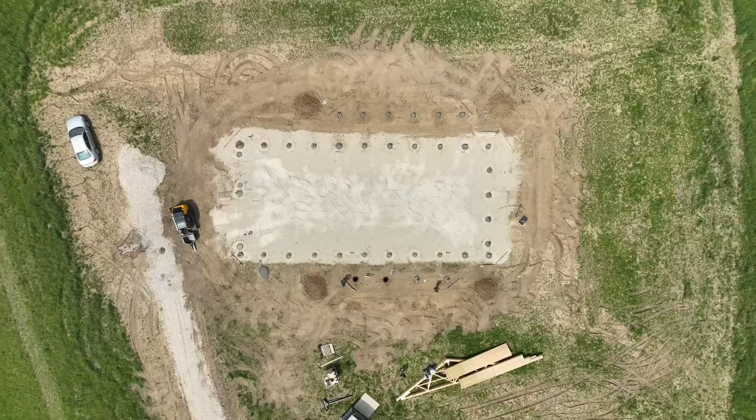We started a new build on Tuesday, so we got the footings in, brackets, and a couple walls already built. I'll give you a rundown of this project, what it is. It's a 36 by 72, 19-foot sidewalls. It's going to be a pretty cool place.

We're doing the shell, and the clients are going to try to finish this out on their own. We'll see if we can get you in here to see this, but there's going to be a master across the whole back of the house, and there's going to be an office.

There's a huge kitchen, open area, and when you come in the front door, which are double front doors, there's going to be staircases going up both to the right and left, and a catwalk between them. There'll be 3 bedrooms, a couple bathrooms upstairs, plus a huge bonus room that overlooks a 19-foot ceiling. It's going to be a pretty cool place.

But we'll take you up here and show you kind of the layout. We'll revert back to the plans, but for those of you who don't know, we design post frame barndominiums, shops, garages, whatever the case may be.

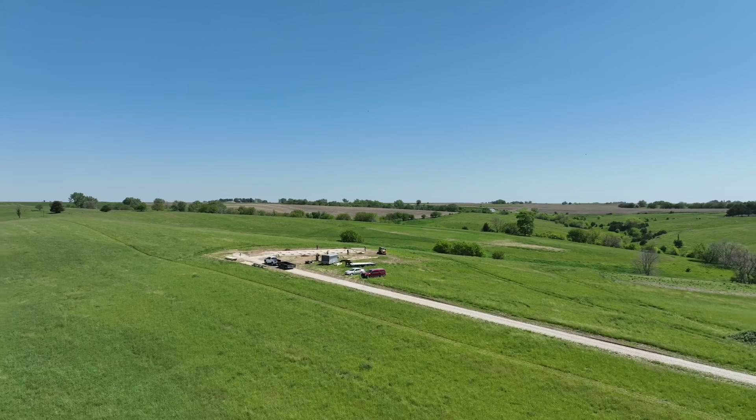But we'll go over here and check this out and show you what we got going on. So you cannot see this place from the road, but there's a long driveway. The driveway comes up here, and then you will enter the garage.

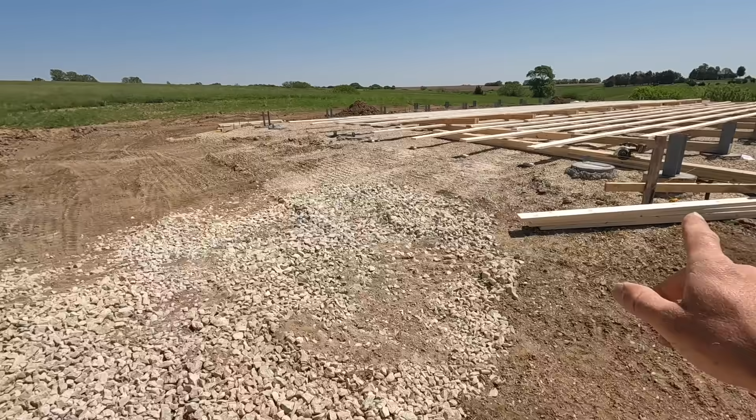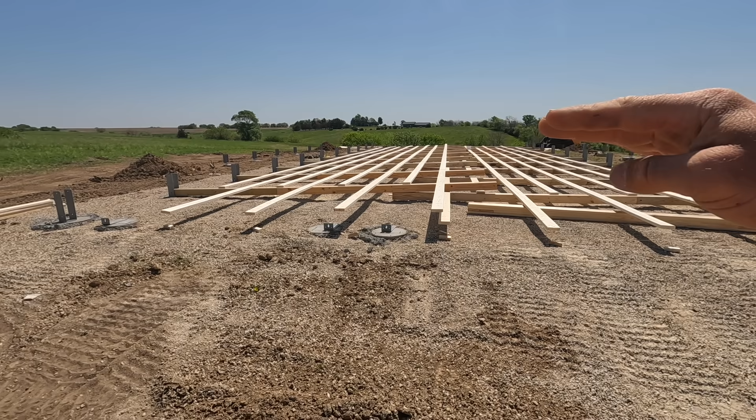So we have a 16-foot wide garage door, and then a 9-foot garage door right here. Over the garage there's going to be a room. I think there's 17-inch floor trusses in this build, and that's why we had to go with 19-foot sidewalls in order to span the width of this garage here for those floor trusses.

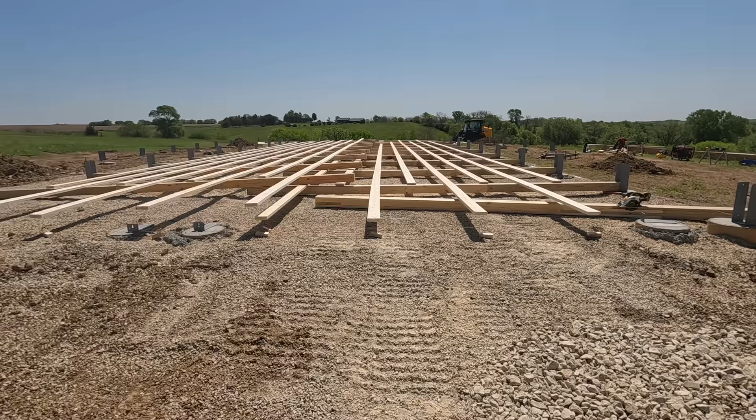But in the front, which is the front, as you're coming up the driveway, there will be a 30-foot wide A-frame. It's got 4 posts, 10-foot spacing, so there's going to have to be a glulam to go all the way across there, and then there will be a big A-frame going in the main entrance.

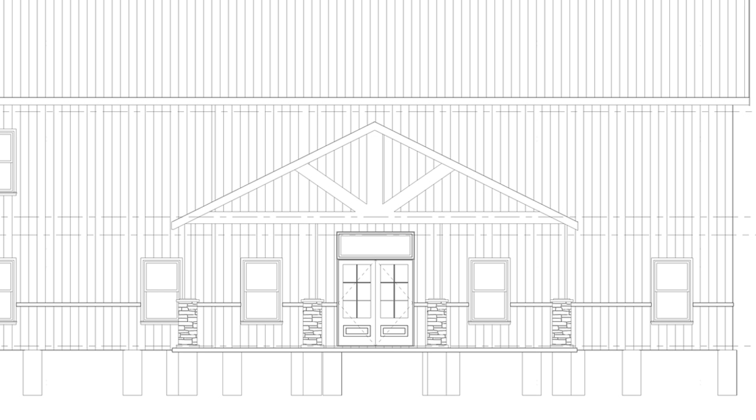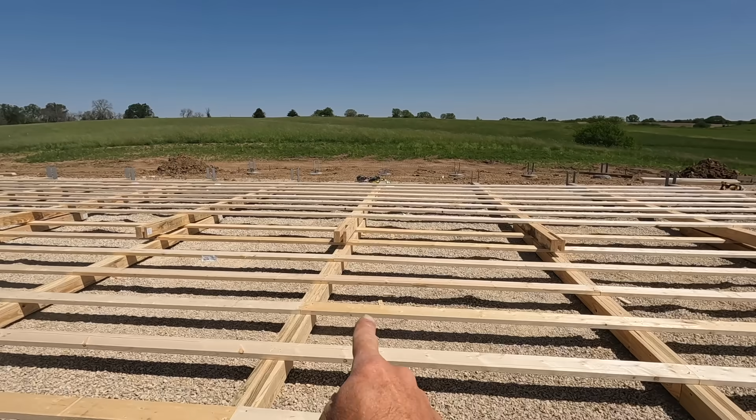Which will be double doors. So the double doors will be right here, and as soon as you get in, there will be a staircase going up to the left and a staircase going up to the right. You'll be able to see all the way through to double doors going out onto a 40-foot by 10-foot deep porch in the back. It's going to have hip ends like you see us do, not gable.

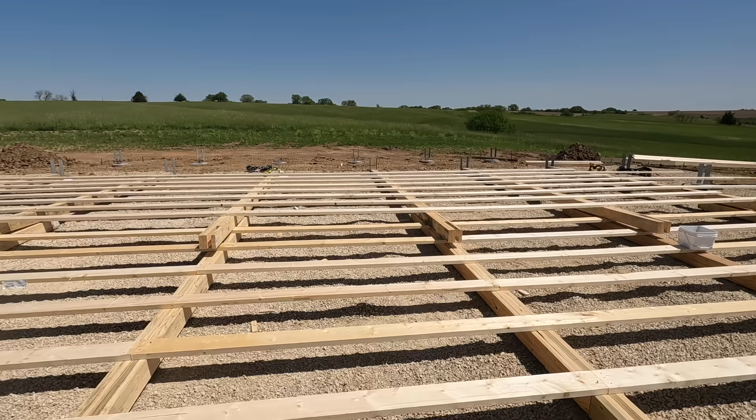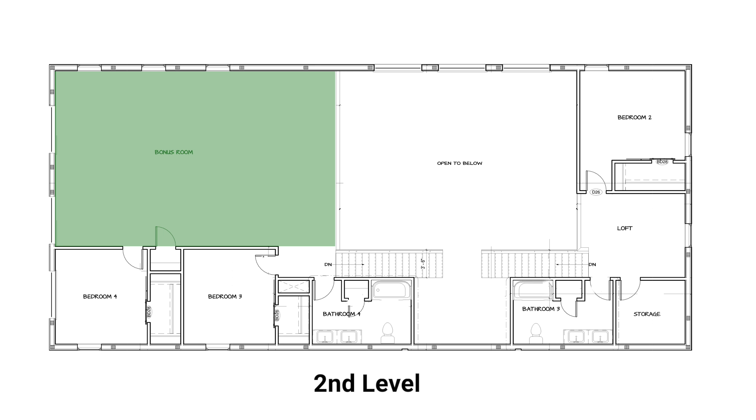The master will run all the way along the back, and then there's an office down here. This is a big open area. There will be a catwalk between the 2 stairways, and like I said, there's 3 bedrooms, 2 bathrooms, and then a huge bonus area above the downstairs. So it's going to be pretty cool.

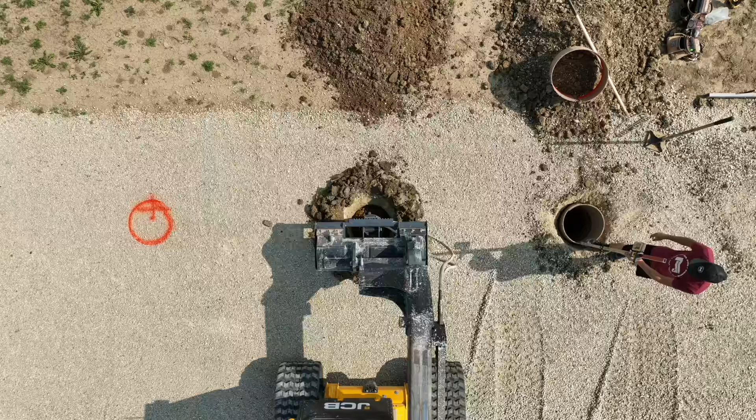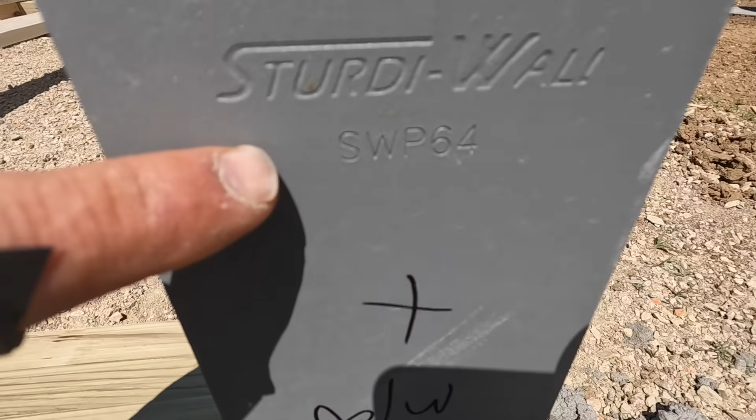Some of the things structurally with this building is we did 18-inch piers. That's kind of our standard, with Sturdi-Wall brackets. I don't know if we can see that. This is a 2x6 4-ply column.

So we got SWP 64s, and they are wet set into our pier. The piers have C4 in them, which is commonly used in any footing application.

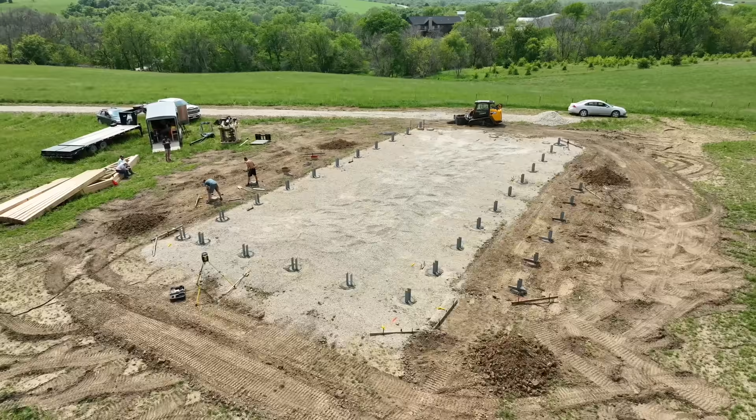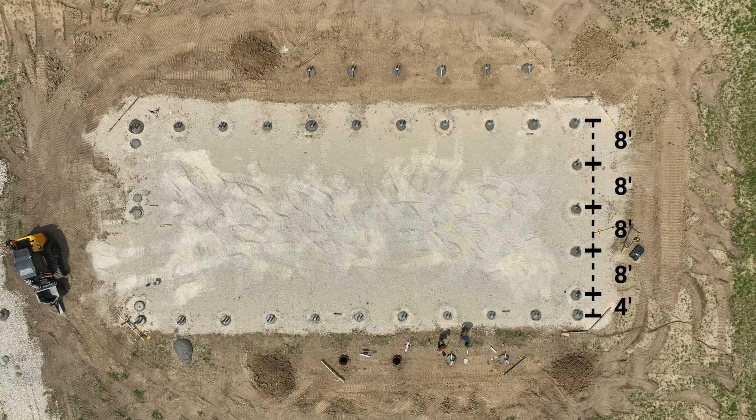This is 4,000 psi concrete, and our piers and columns are all 8 foot on center. We do have a little bit of an odd spacing on the back side because the building width the client wanted was 36 feet. So we had 8 foot, 8 foot, 8 foot, 8 foot, and then there's just a little 4-foot section over there. Typically we try to stay away from that unless somebody wants what they want, and then we work around it.

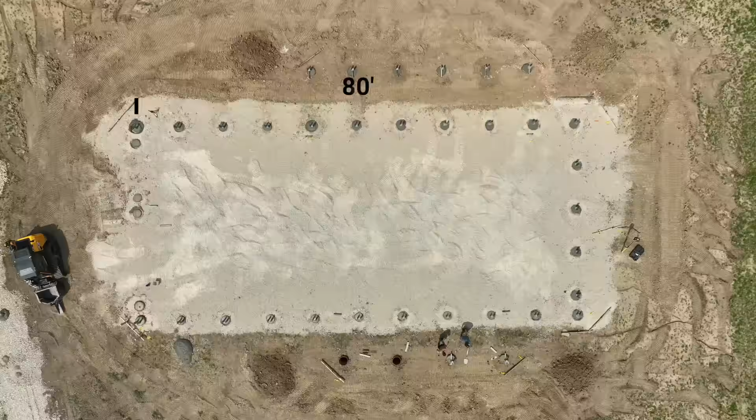It's not nearly as important on the end walls as it is on the side walls. This along here is 80 foot, so we are 8 foot on center all the way down the side, so our trusses will sit on a column on each side, so they're perfectly in line, and all of our trusses are 8 foot on center.

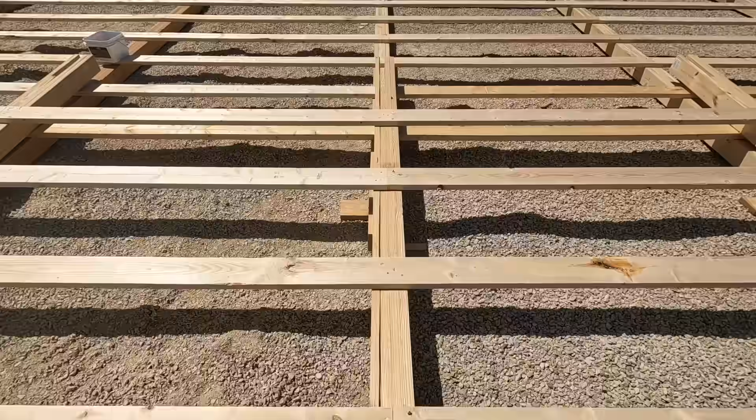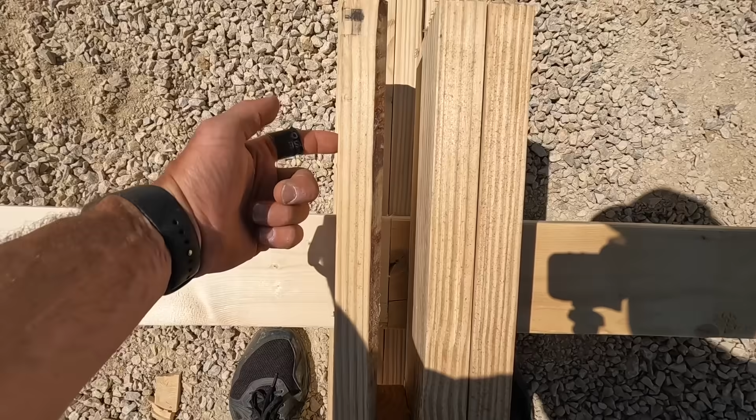They will sit in these pockets at the top of our column. So the truss will get set in here, we'll nail it in with 30D ring shank nails, and then we will run a 1/2 inch through bolt through the top once our building is squared to lock this all together.

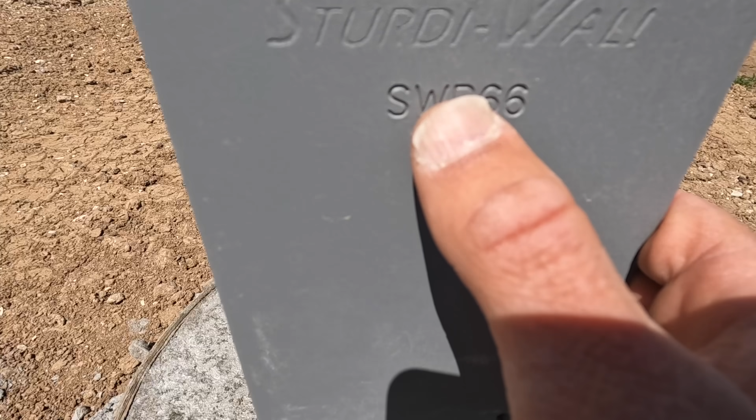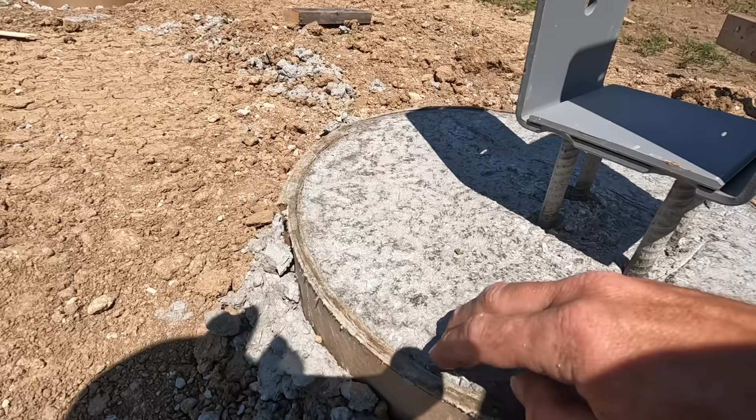As far as all of our porch brackets, we are using 6x6 posts, so that bracket is an SWP 66, which is for a 6x6 post. You can see what we will do is find the final grade of our concrete, which is right below this bracket, and then we will set our pier 3.5 inches below that.

So when we pour this, we'll slide a 2x4 across so it sits on this form, take our bracket down until it hits that, and what that does is allow us, when we pour our concrete porch, to pour the concrete through here, and then there's no outside corners that can potentially crack. If you box this in and pour it, there's a high probability that eventually you'll get little cracks off the corners. Anytime you have an outside corner on concrete, there's a high probability that you'll get a crack from there.

So that's how we deal with that, and it makes it real quick and easy to set these brackets without having to build any forms, because if we were to box them in to pour a box for our bracket to sit on, it would just take a lot more effort.

I used to do it like that, and I got to thinking, why don't I just set this bracket up a little bit, pour the concrete under it, and it's worked amazing. So that's how we do it on all of our porches. We have videos on that we can share with you.

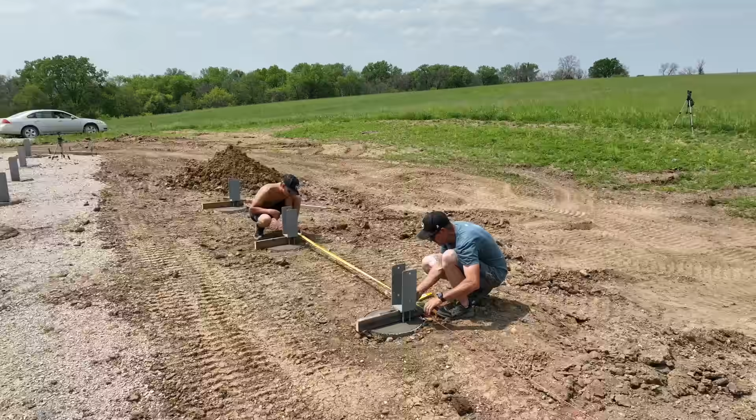You can see it sits up. This is not an issue. We do not do this on the main structure of our house, but on our porches we do.

So if we step back here, this is the back side of the house. We've got the double doors coming out, and then we have a 40-foot wide porch.

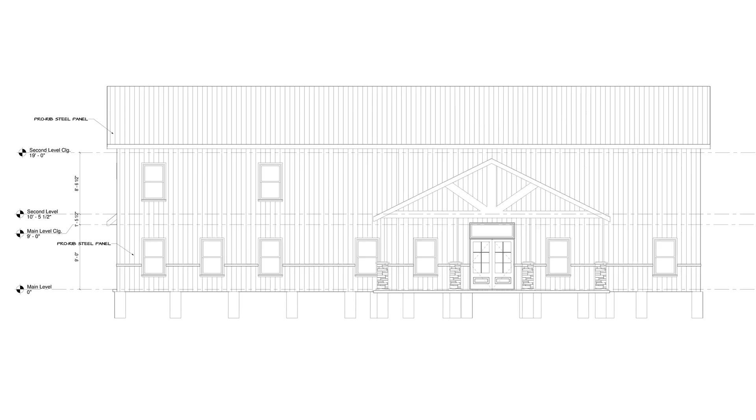I think there's probably about 28 to 30 windows in this place. We're getting ready to make some window boxes. There's a lot of windows, most of them are 3x5s. There's some transom windows above the garage, and there's a 6x2 transom window above the front double door, which is going to be pretty cool. We'll show you how we frame all that up in this series.

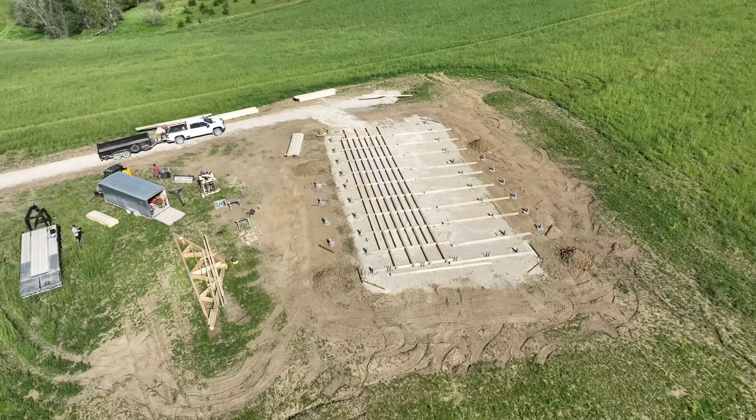Trusses are 5/12 pitch with 15-inch heels. The 15-inch heel height allows us to get over an R40 of blow-in insulation in the attic over the entire ceiling, so that's why we do that. Unless somebody wants to spray foam the roof, then we can go with the standard heel height, which is usually around 9 to 10 inches.

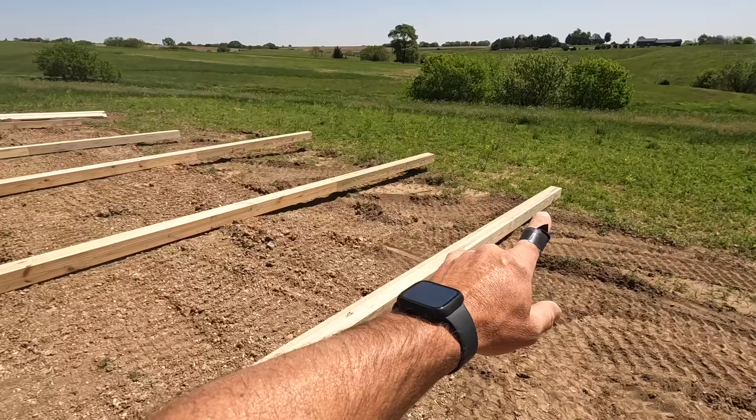Here we've got all of our end wall columns all laid out, and on our end walls we run our columns from the bracket all the way up to the top chord of the truss.

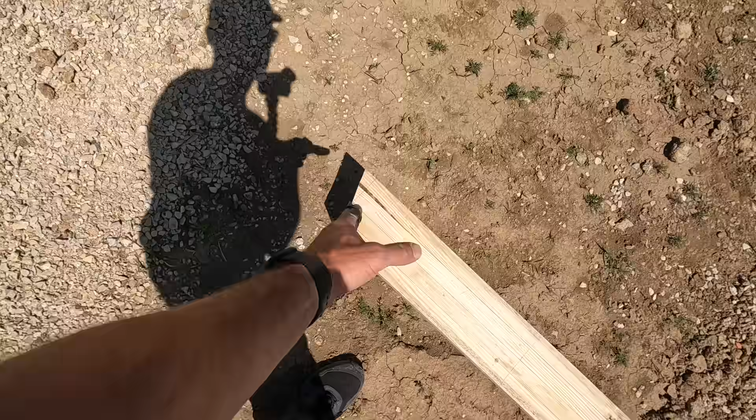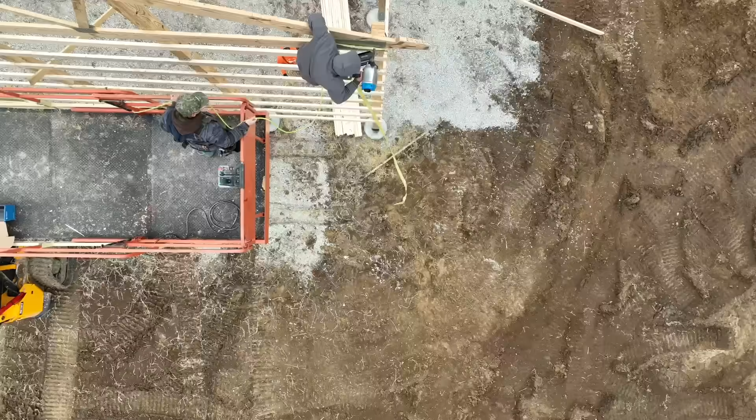So you can see we calculate how long it needs to be, and we cut the roof pitch on there. That way when we put our end wall truss up, it gets face nailed into these end wall columns, and that top chord of the truss is up here, so it's getting nailed into this column.

These piers, like I said, are 18 inches in diameter and they're 54 inches deep, so they're good and solid.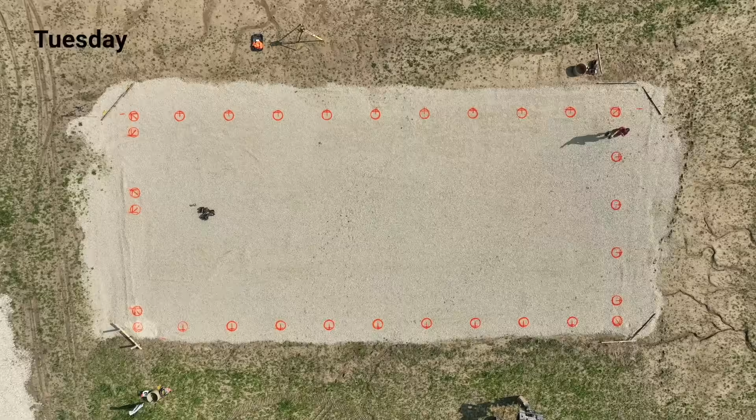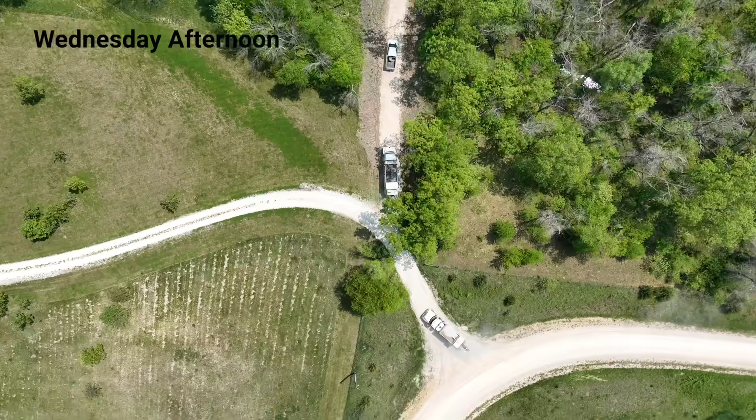So to give you an idea how long we've been on this job, we laid out and drilled all the piers on Tuesday. Wednesday, we didn't get here till noon, that's when the concrete trucks got here. We were done pouring them all probably about 3:15.

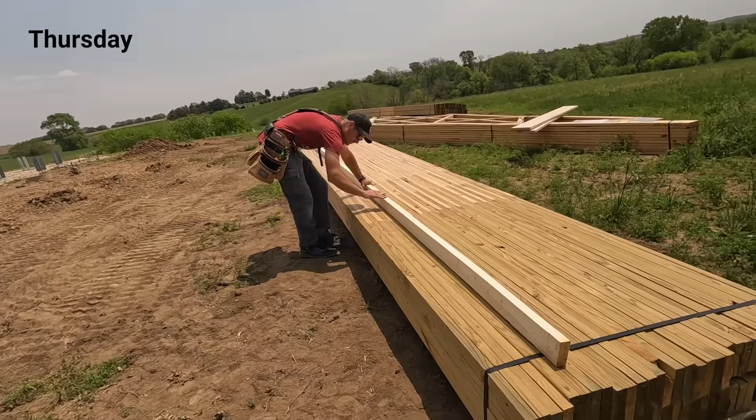So we only had a few hours in on Wednesday. Thursday, we ran and got all of our lumber because we couldn't get lumber delivered on time, so we went and got that ourselves, got out here about noon, got all the columns marked, cut, and prepared yesterday afternoon, and one of the walls pretty much laid out.

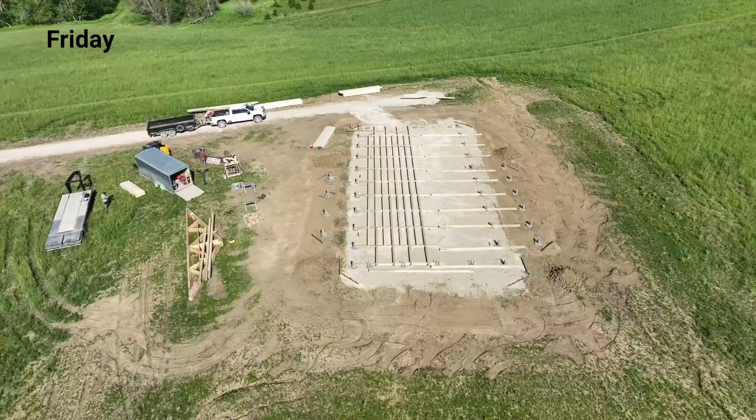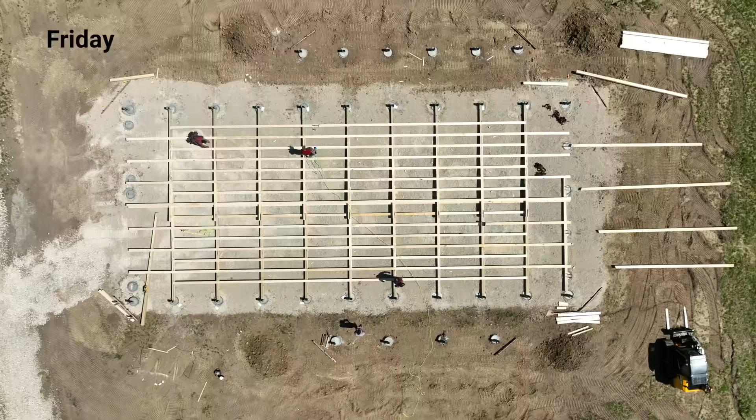And today it's 11:40 right now, and we have the other 80-foot wall all laid out, nailed, ready to go up. So we have our two 80-foot walls ready to go up. We got all of our columns prepared. We're going into a 3-day weekend.

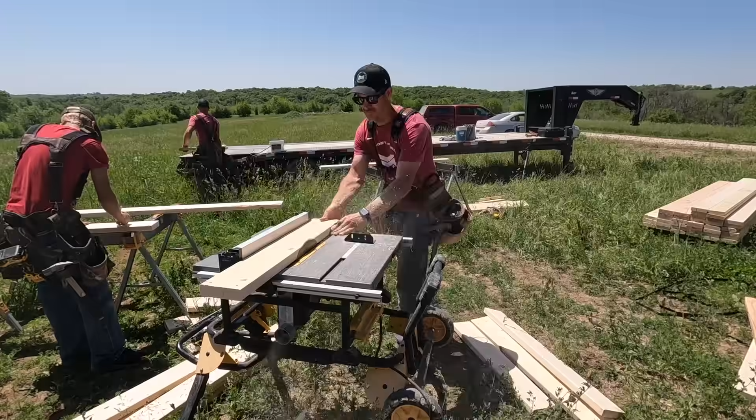I don't have my lift here, so what we're gonna do this afternoon is make all the window boxes and probably get all of our purlins cut and prepared. So we're basically 3 days in, and we're gonna have a lot of work done. Tuesday when we get back here, we should start seeing a lot of change in this.

So it moves along pretty quick if you have kind of a process that you follow, and that's what we're trying to help people out with, especially people that want to self-build.